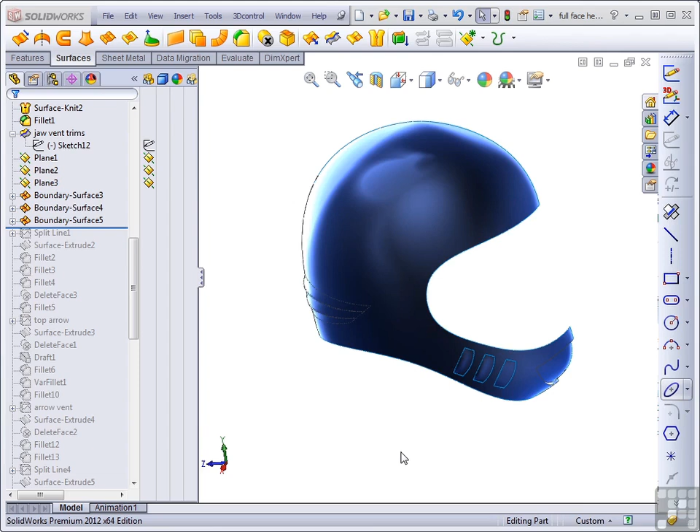In this lesson, we're going to work more in the mouth vent area. In this case, we want to make some more indentations in here. But the way we created the mouth vent was kind of tedious: trimming out the area, using an offset surface, creating ruled surfaces, and then doing the multiple trim. I'll show you what might be considered an easier way.

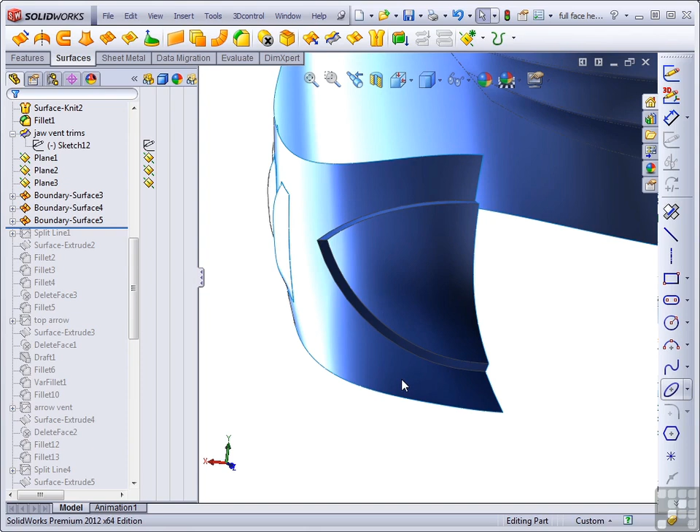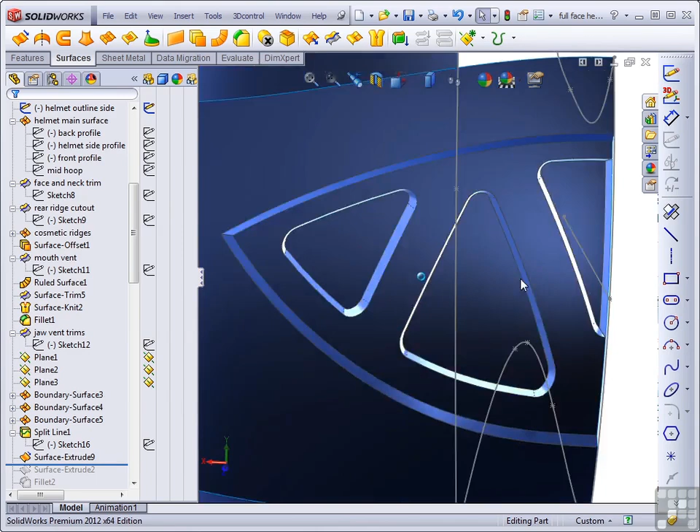Boxes. Let's go through those again. The selection boxes in this case are the direction, cap end, delete the original faces, and knit result. Now, if we look at the end product, we notice we've got a problem. We've got an extra face in here that we don't really want or need.

Let's turn off the sketch that we don't need anymore. So in this case, what I'll do is just use the delete face feature, select this, make sure that we have delete selected and not anything else, and then say OK.

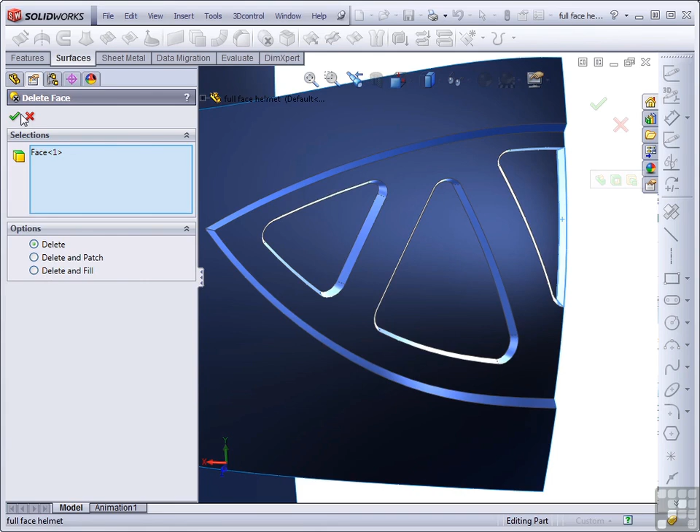Now this is going to cause a slight problem for us later on, but we'll be able to work around that. Notice that we had the 15-degree draft on this, and so this edge is not going to be right on the symmetry plane. And so we'll have to fill that in with a boundary surface later on.